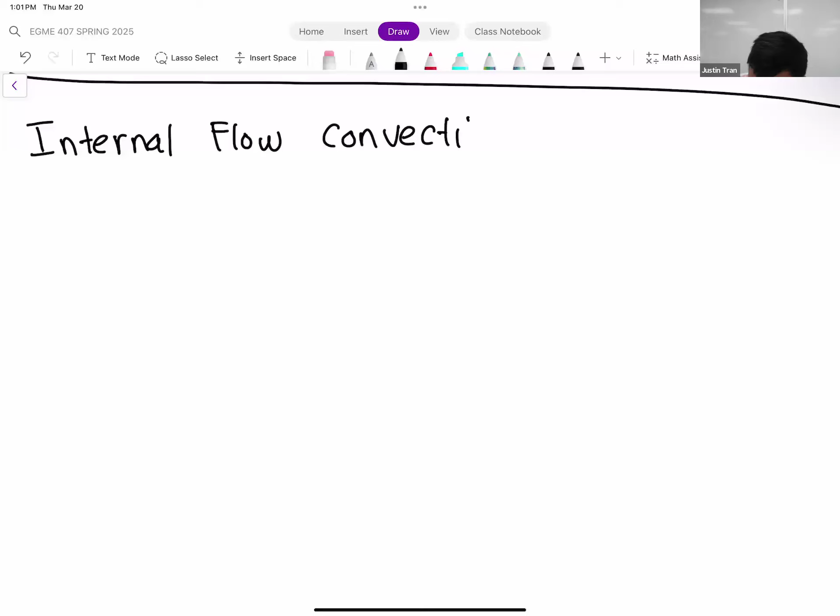So on Tuesday we started talking about internal flow convection. The theme of this entire unit is looking at convection in various different scenarios, because one thing we've been talking about for the past couple of weeks is that the flow conditions or the fluid mechanics of the situation play a big impact in terms of the heat transfer in these kinds of situations. So every time you have a different type of geometry, a different type of flow condition, that's going to necessitate a different discussion on the convection, okay?

In particular, in internal convection, we're looking at flow situations where the flow is bound on all sides by some kind of solid surface.

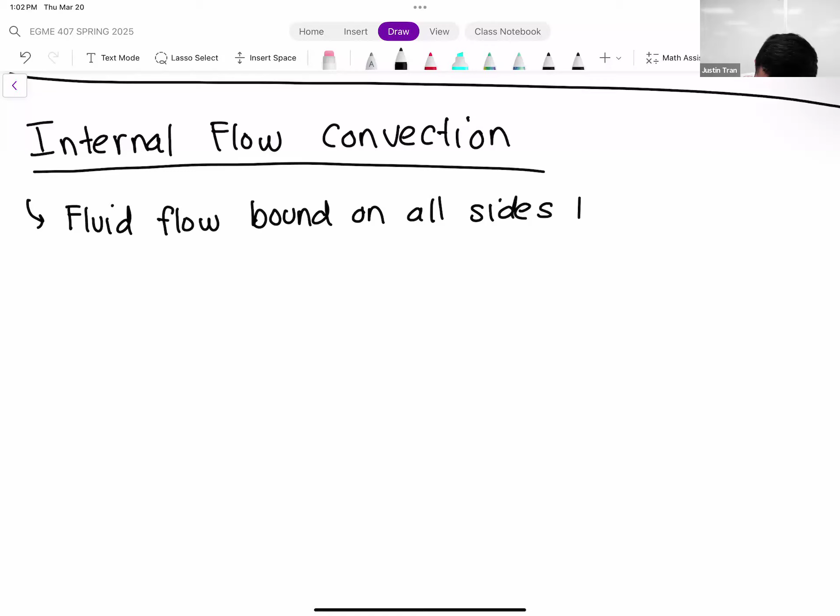Okay, so the very typical case of internal flow convection is flow in a pipe. So you have flow coming in here. The big thing with internal flow convection is that there's no notion of a free stream, because once the flow enters this internal system, the boundary layers from all of the lateral walls are eventually going to meet.

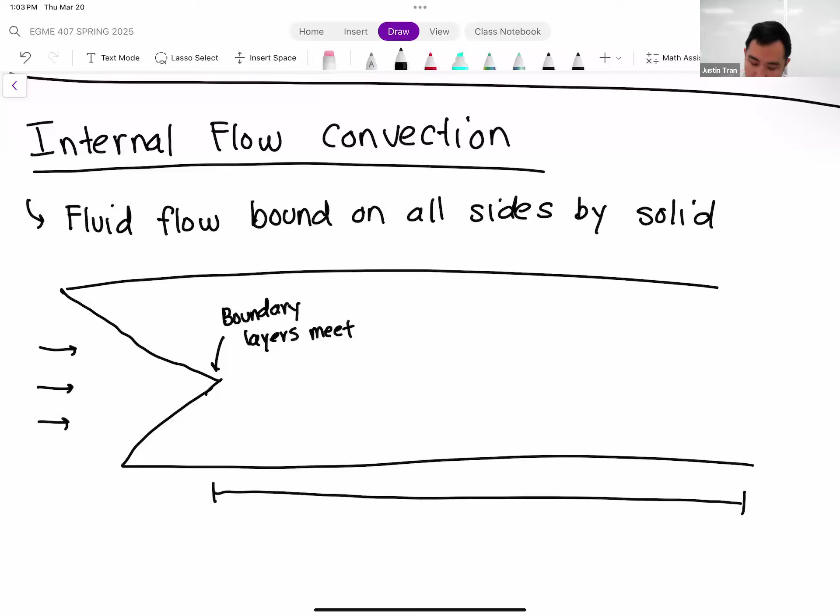Eventually, for pretty much every internal flow, unless your pipe is only a couple millimeters long, you're going to have a region which we call the fully developed region. The characteristics of the fluid flow and the heat transfer in this fully developed region have a very different character and behavior from what we discussed for the free stream, which is what we did last week.

One of the main differences is that because we have flow that's bounded on all sides, what we typically say is that inside this pipe we have a finite amount of fluid. Oftentimes you can compute a number for the volume of fluid inside a pipe — you just take the volume of the pipe itself.

That's significant because as we apply heating — let's say we're heating the fluid externally, or the fluid is losing heat, either case — because we have such a small amount of fluid inside this pipe, any kind of heating or cooling that we apply to the fluid is actually going to make a big impact. It's going to influence the temperature of the fluid itself.

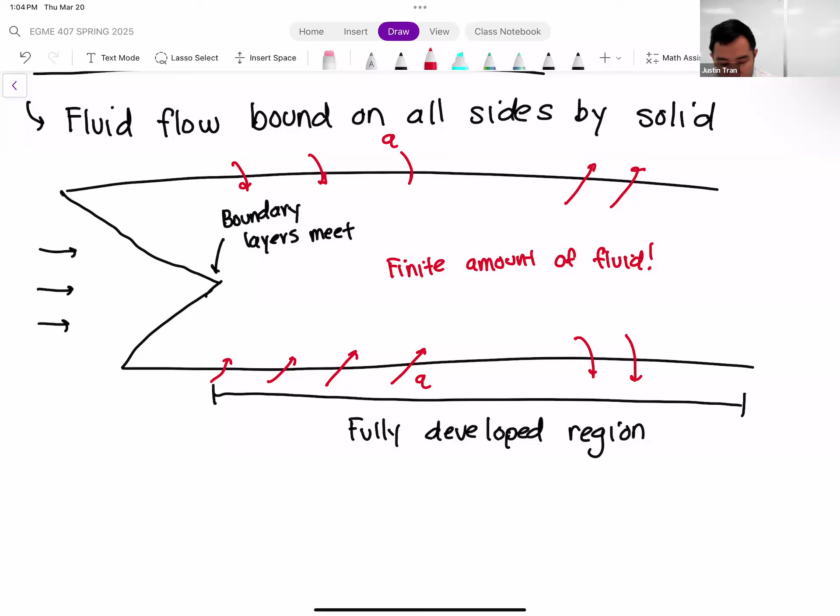So that's the biggest difference compared to pretty much everything we've heard so far: the temperature of the fluid inside the pipe is actually going to change along the length of the pipe. That's in stark contrast to external flow, where we assume our free stream temperature and free stream velocity are usually not really affected by the fluid, so we kept those constant. But in internal flow, instead of T infinity, we have Tm, the mean temperature, and we know the mean temperature is actually going to change.

So that's the first thing I want to start with today: what are some methods, or how do we actually solve for this mean temperature, and how does it typically change from one point to another along the pipe?

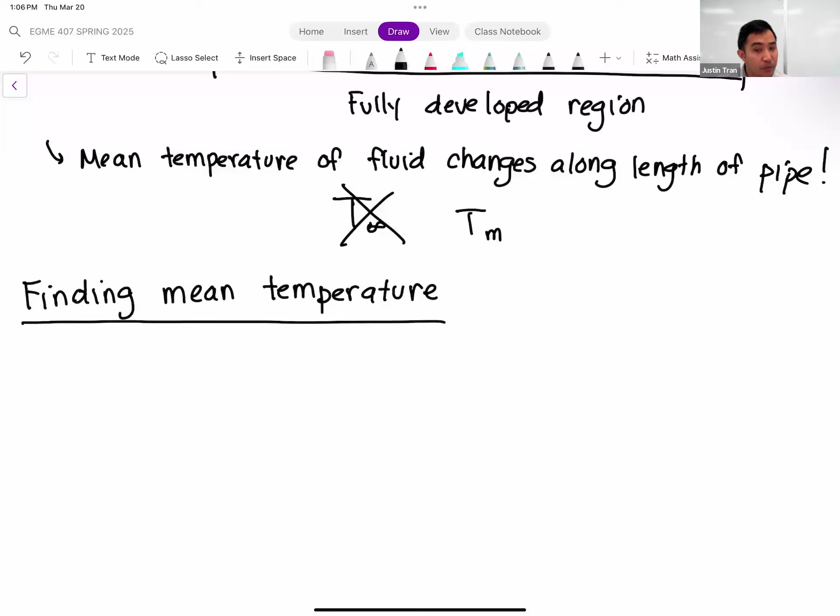Let's see if we can come up with an equation or formula, a way to compute this mean temperature at two different points in our fluid. Let me go ahead and draw our pipe here. We have flow coming in, and let's say that typically we describe the flow as a velocity, but since our velocity is also changing across the cross section, it's a little more convenient to talk about it in terms of its mass flow rate.

So I'm going to start to introduce m dot — the mass flow rate of fluid going through the pipe. Typical units for mass flow rate, which you've probably seen in other classes before, are mass per second. That tells you just how much mass of fluid is going through the pipe at any given second.

Okay, the next thing I'm going to draw here is an energy balance. Let's draw a very small control volume here. This little dotted box is our control volume, and on this control volume we're going to do an energy balance, which we'll use to come up with an expression for the mean temperature in the fluid itself.

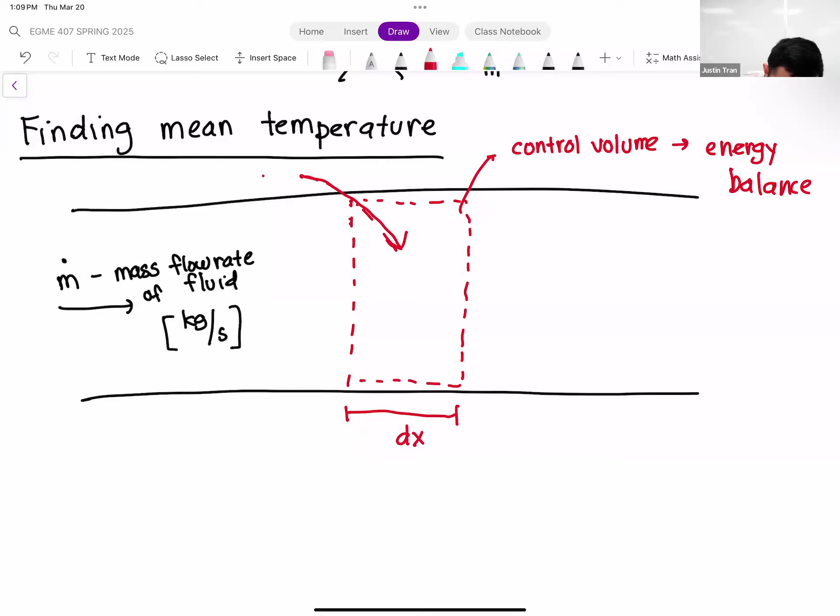To keep things simple, we're just going to assume one source of heating — some heating coming from the wall into this control volume. That's going to be Q convection, or more specifically dQ convection, just to indicate that it's on a small control volume. This is going to be the heating that occurs through the wall into our control volume.

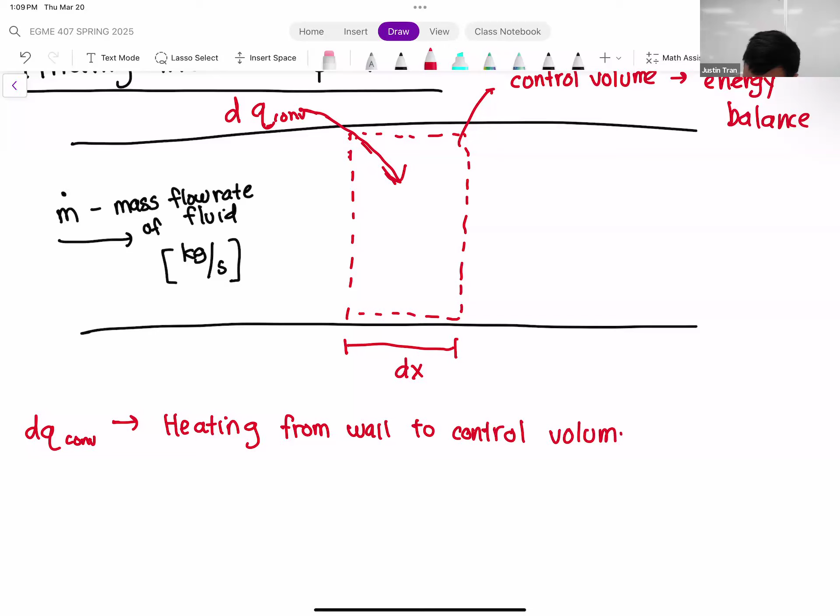Okay, so let's see if we can come up with an expression for dQ here, based on some things that we know. First thing we're going to set it equal to is dQ convection equal to our Newton's law of cooling.

Anytime we have convection heat transfer, we can always relate that to Newton's law of cooling. So we can say that dQ convection is equal to H, the convection coefficient, multiplied by the surface area of this segment here. I'll call that dA for now, the surface area of our control volume.

As part of Newton's law of cooling, we need to multiply this by a temperature difference. In this case, the difference between the surface temperature of the pipe and the mean temperature of the fluid, so this is Ts minus Tm. Ts is the surface temperature at the wall, and Tm is the mean temperature within that control volume.

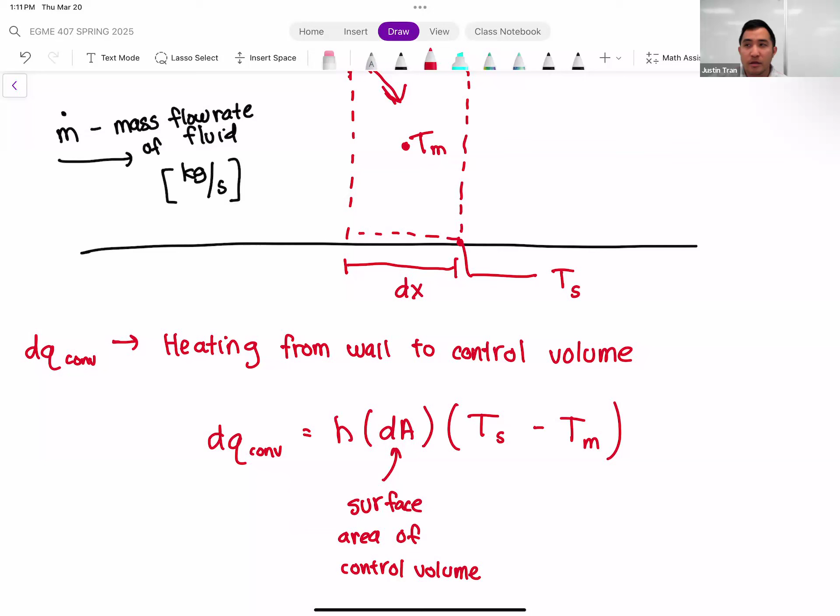In a generic case, both the surface temperature and the mean temperature of the fluid are going to evolve from one point to the next. If we look at another control volume, the surface temperature and the mean temperature are going to be different at that location, but we're just focusing on this small one, right in the middle there.

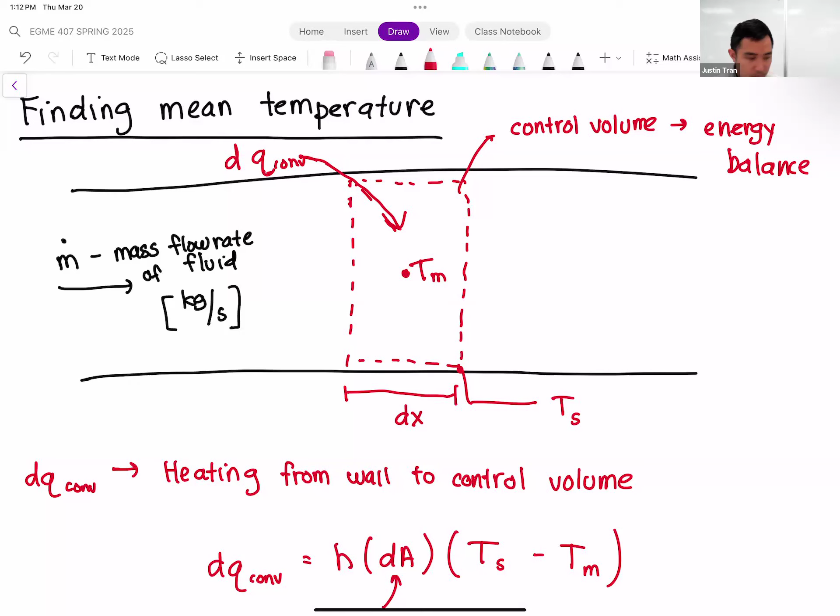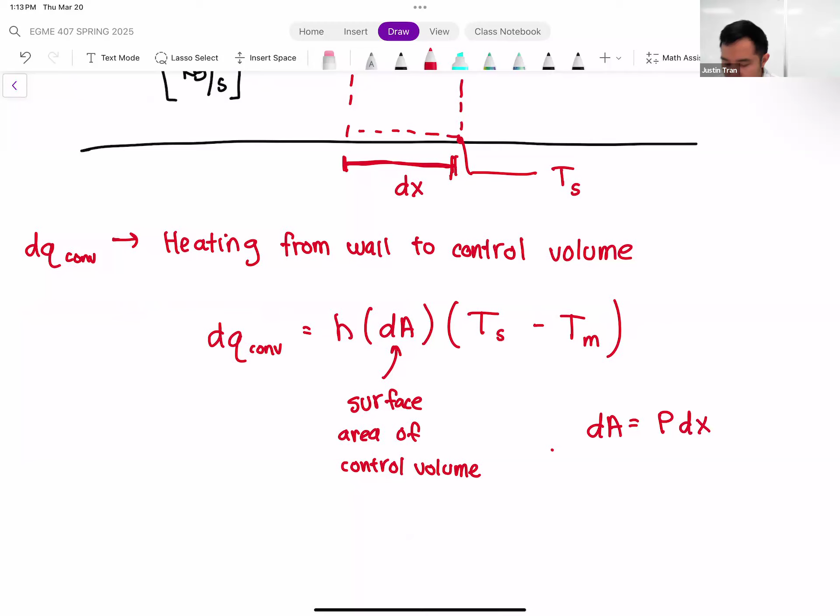One other thing I'm going to do to simplify this, we can come up with an expression for the surface area, or plug in for that a bit, because we know the width of this control volume is dx. To compute the surface area of this section, we leverage the fact that this is a cylindrical geometry, so the surface area equals the perimeter of the pipe around that cross section, multiplied by the width of our section, so it's P dx.

I should probably stop using red. So if we plug that in, we get dQ convection is equal to HP dx times Ts minus T infinity. This right here is simply an expression of Newton's law of cooling on this small control volume.

Any questions on this so far? All right, so let's see if we can come up with another expression for dQ convection, because I did say that we are going to do an energy balance on this control volume.

So let's do our energy balance now. Oh, thank you, I messed that up. So it shouldn't be T infinity, it should be Tm. Thank you.

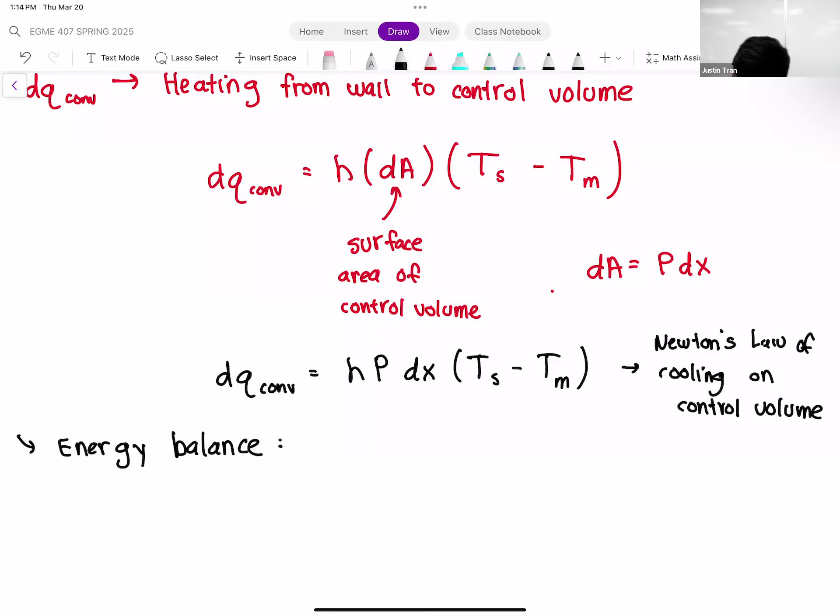For our energy balance here, we're basically going to say that the heating we're applying to this control volume is going to result in a change in temperature. Because of conservation of energy, energy can't be created or destroyed, and if we are inserting energy into our fluid, that has to have some effect we can observe. The first thing we can observe when you add thermal energy is a change in temperature.

So what we can say is that dQ convection is equal to a change in temperature, so this is equal to dTm, where dTm represents a change in temperature in the fluid.

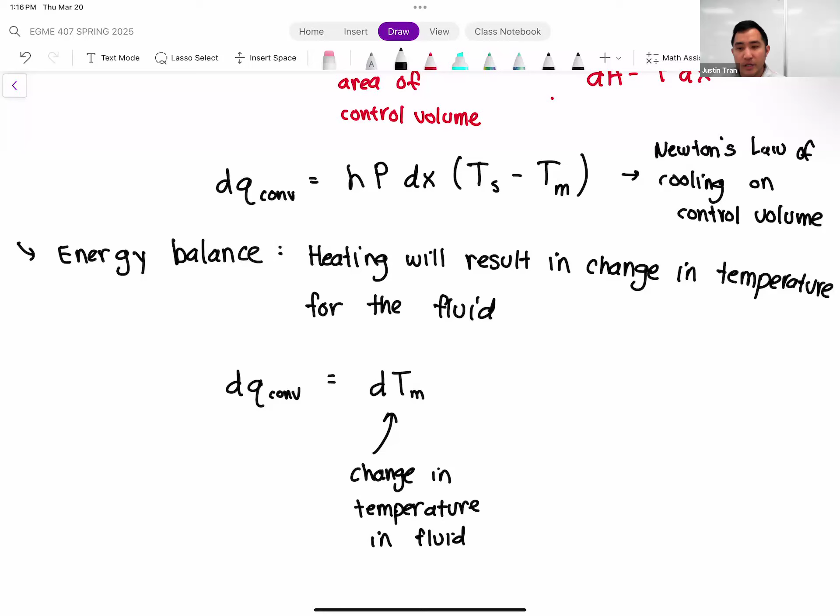We need to multiply by some other factors here, mostly to make the units work out, but also to account for the fact that different fluids have different changes in temperature, because different materials or fluids have different heat capacities. That should be reflected in this equation too, so the two things we need to multiply by, the first of which, is CP, the thermal capacity of the fluid. Remember, we saw this quantity back when we did lumped capacitance.

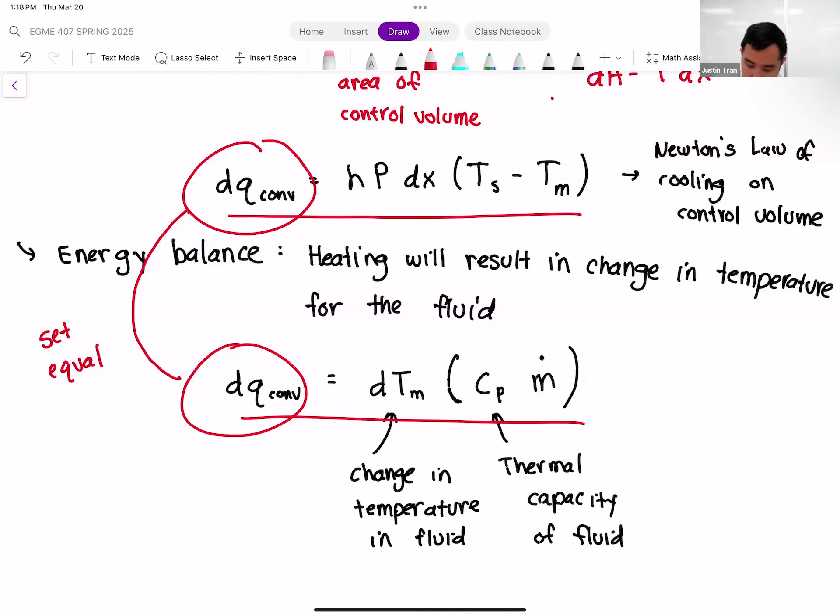So when we do that, let's do the Newton's law of cooling side first. We have H P dx multiplied by TS minus TM, and this is equal to the conservation of energy side, which says dTm multiplied by CP m dot.

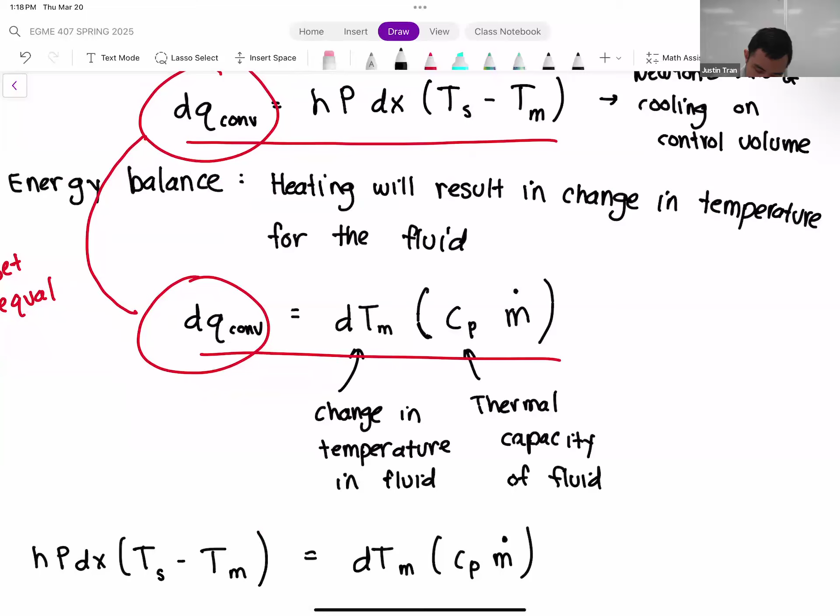Let's rearrange the terms a little bit here, just so that we can obtain a differential equation for this. So I'm going to take dx and divide both sides by dx, so that's going to come over here. I'm going to take this CP times m dot and divide both sides by that, and that's going to end up on that side. So if we do that, we get P times H divided by m dot CP times the temperature difference TS minus TM is equal to dTm dx.

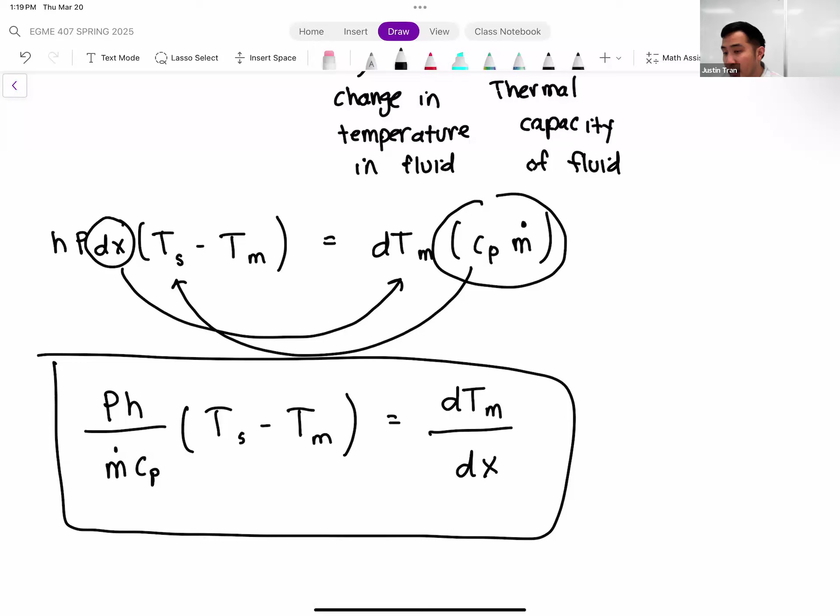And so what we have here is an equation that we can use that describes the evolution of the mean temperature in an internal convection situation. Any questions on how we got this equation?

So it looks like a fairly straightforward equation, a differential equation. We do have a first order derivative, but we've definitely seen scarier things in this class. But it turns out this equation is actually very difficult to solve, because you can't really just straight up integrate it. First of all, you have Tm on this side, which is what we're solving for, and we have Tm on this side as well. So just by the existence of these two things on both sides, this tells us that Tm changes along the length of the pipe, or in other words, it changes in the x direction. And that's the first thing that complicates this, so it's not just going to be a straight up integral on both sides.

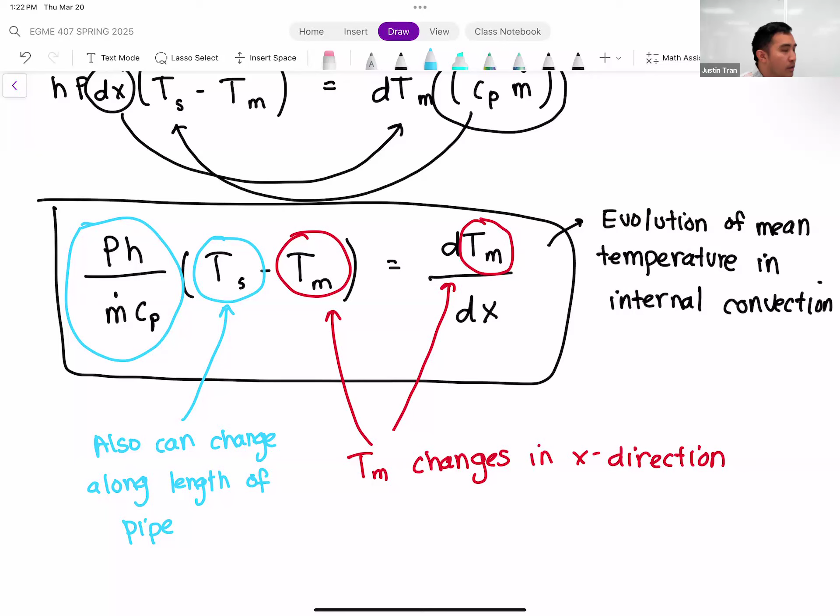But another thing that we haven't really talked about is that another thing that can change along the length of the pipe is the surface temperature. And we don't really have an equation that will tell us how TS will evolve. So this equation, even though it looks quite simple, and even though everything out here, the P H, m dot Cp, are typically constants, the fact that we essentially have two unknowns in this equation, both Tm and Ts, means that we cannot really solve this equation without applying some assumptions.

So we can really only solve this equation under some very specific circumstances, very specific assumptions, which in reality, it's very hard to find one case or the other. We'll talk about some cases where these assumptions are valid, but most practical situations are never going to be one or the other — they're going to be more in between. So part of the challenge of doing these problems is making the judgment call, making your own judgment in terms of which of these situations it's going to be closer to.

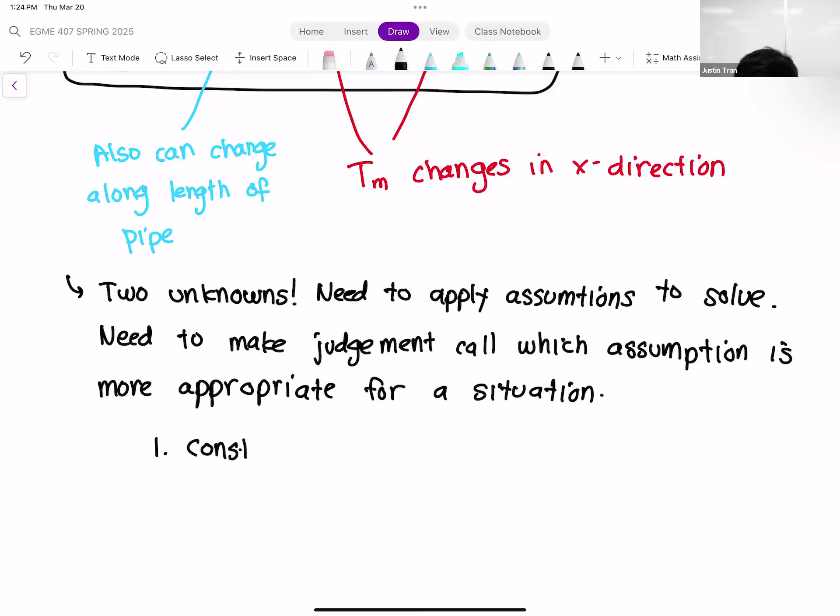So the first situation, which is a little bit simpler, is if we assume that we have constant heat flux from the wall. That's the first example we'll do, and you'll see what the solution looks like in that case.

And the second condition, which is more appropriate in other situations, is if we assume that our surface temperature, so the temperature at the surface of the pipe, is going to be constant.

So you're never going to have both of these, you're going to have just one or the other. I want to emphasize that. For this situation, you're going to choose one of these assumptions, and which one you choose is going to be more appropriate in some situations than others. Any questions on this so far?

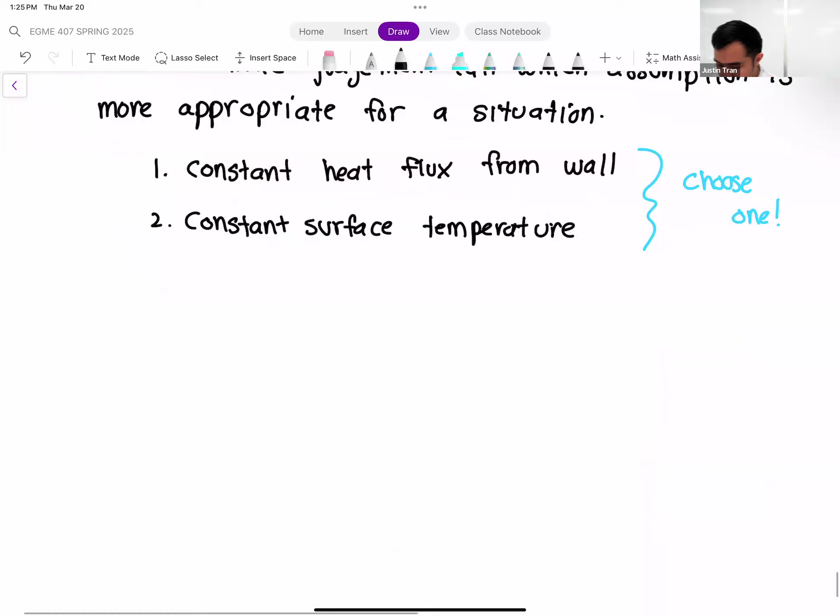All right, so let's look at the case for constant heat flux from the wall. So what this is basically saying is that as we go along the pipe, the heat flux that's coming in, which we're going to call QS double prime...

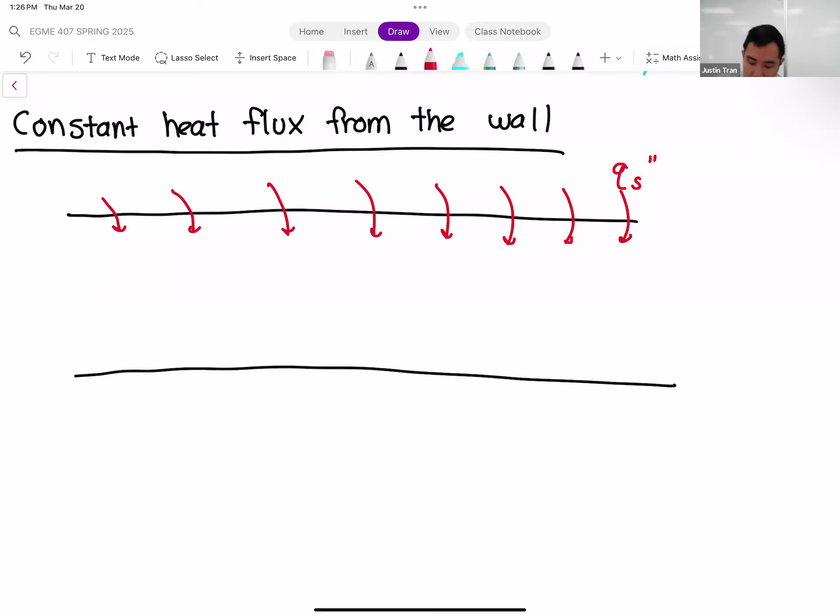So the heat flux in the pipe is going to be the same from one location to the next, and so we have a constant QS double prime. It's going to be the same at the end of the pipe, the same at the middle of the pipe, the same at the beginning of the pipe. So all throughout the pipe, you have a constant influx of heat, and that value is consistent along the entire length of the pipe.

A common situation where this would occur is that maybe you have some kind of consistent heating applied by an electric heater. It's common nowadays to have an electric heater wrapped around the pipe, supplying a constant heat flux throughout the entire length. Another case, actually, just thinking about it...

If you look at the design of newer houses nowadays, it's very popular to have something called a tankless water heater. The way it works is that it runs the water main pipe through this tankless water heater, a section of pipe that goes through it like this. And on this pipe, if you talk to a plumber, they'll say you basically have like a jet engine inside your water heater, just a ton of flames.

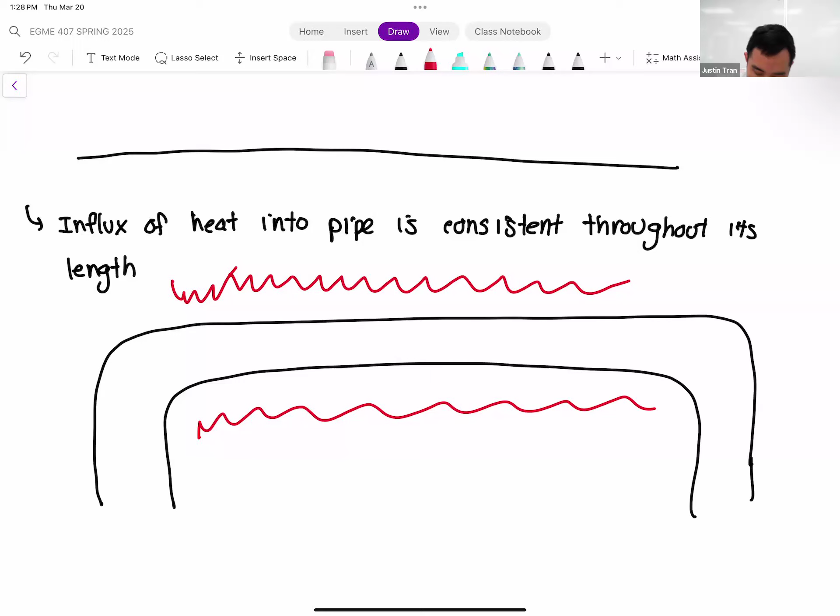You have basically a broiler heating your pipe through this section. The idea is that without a water tank or heat tank, this device is able to provide enough heat through the pipe to supply enough hot water for your entire house. So this would be another example of constant heat flux through the pipe, because this flame is consistent throughout the length of that pipe.

It's really cool. I was able to take a look at mine about a year ago when it broke, and I was bugging the plumber to let me see. But yeah, it is kind of a cool thing.

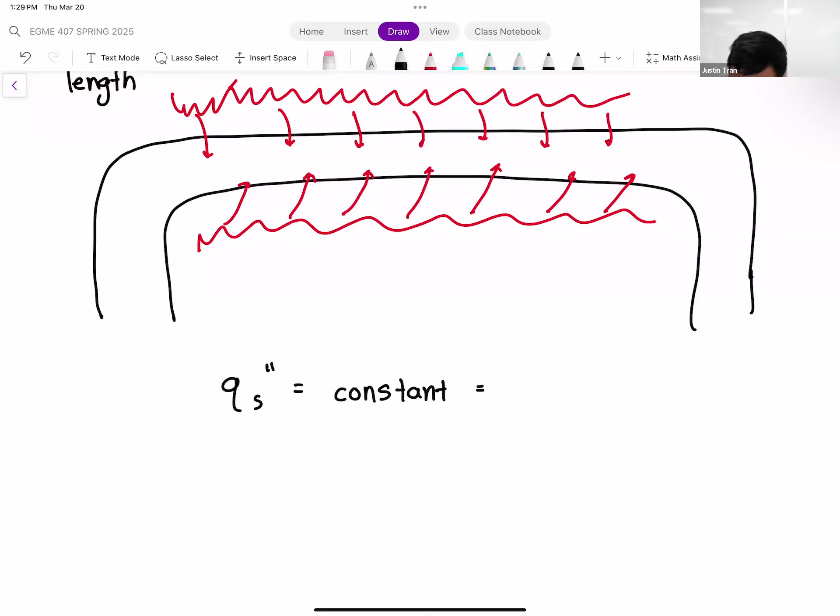So in this situation with a constant heat flux, this actually simplifies our calculations quite a bit, because if QS double prime is constant, what's another expression for QS double prime? We can put this in terms of Newton's law of cooling, so we can say this is equal to H times TS minus TM. That's just the definition of heat flux in internal convection, the convection coefficient multiplied by the difference in temperature.

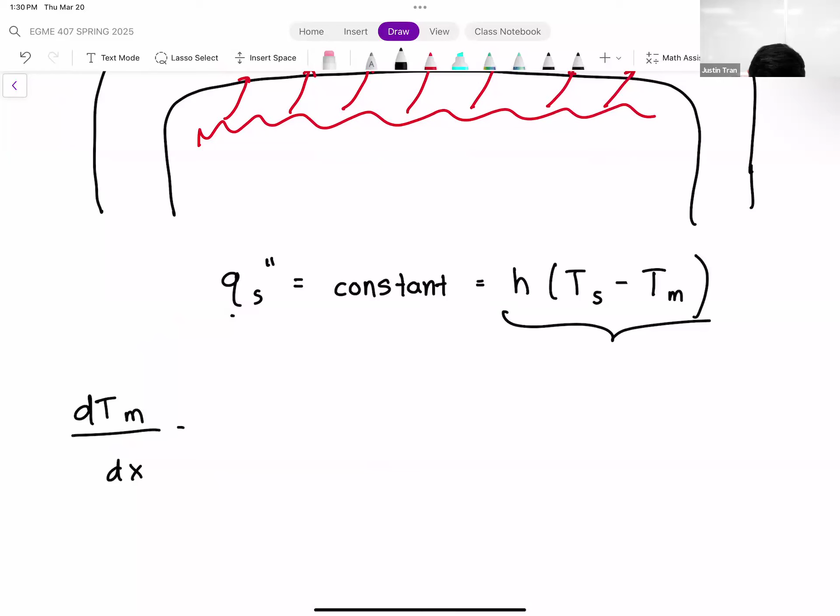But if these two are constant, if we make this jump in logic that QS double prime is constant, that means this quantity H times TS minus TM is also going to be constant. Now TS and TM individually might be changing, but their difference is always going to be constant in this case, so we can make that substitution. If we come back to our differential equation, let me write it down again: dTm/dx is equal to pH over m dot Cp times Ts minus Tm.

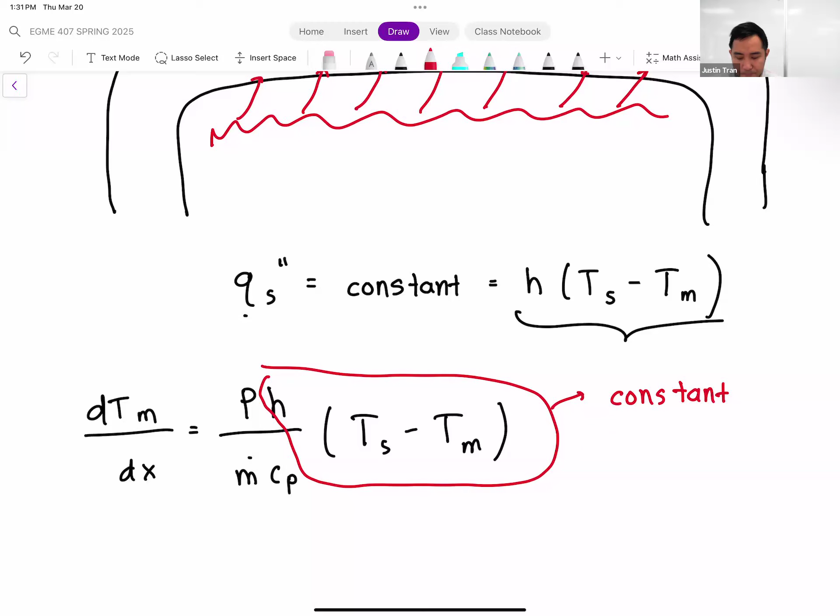Okay, so this right here is our generic formula for the evolution of mean temperature in internal flow. We haven't made any assumptions yet, but if we make the assumption that this quantity here, H times Ts minus Tm, is constant...

So if we assume that it's constant and plug in Qs double prime for that, we have dTm/dx is equal to P over m dot Cp times Qs double prime.

Suddenly we have a very easy differential equation to solve, because everything on the right-hand side, the perimeter of the pipe—assuming constant cross-sectional area, which most pipes are unless you're designing a literal jet engine—the mass flow rate, the heat capacity of the fluid, and Qs double prime, the heat flux, are all constant. So everything on this side of the equation is constant.

That's fantastic, because then we can integrate this with respect to x. What we get is Tm of x is equal to the integral of P times Qs double prime divided by m dot Cp, all of which is constant, so we end up with P Qs double prime divided by m dot Cp times x.

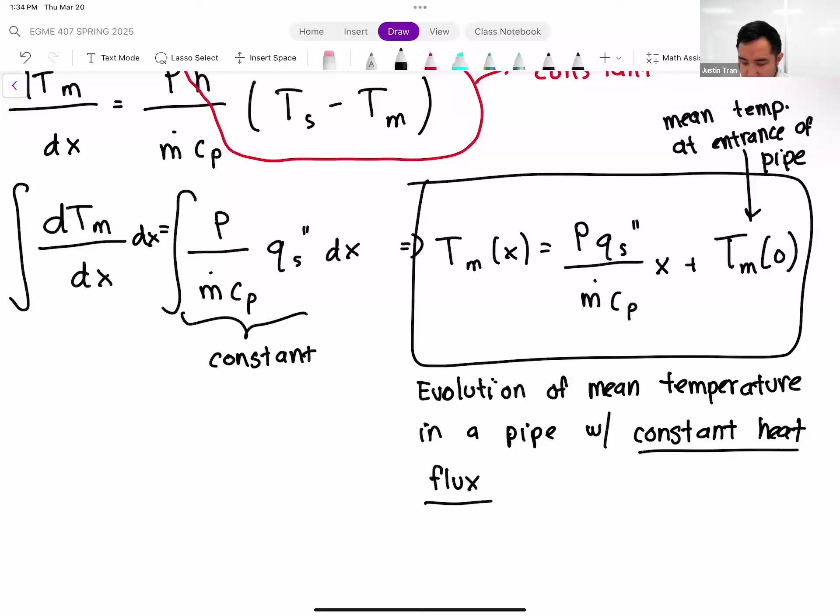Okay, so let's do a quick example of this, just so you can see how all of this works together. Let's look at a tankless water heater.

Let's say a tankless water heater is responsible for heating the water that goes through it from 20 degrees C to 60 degrees C.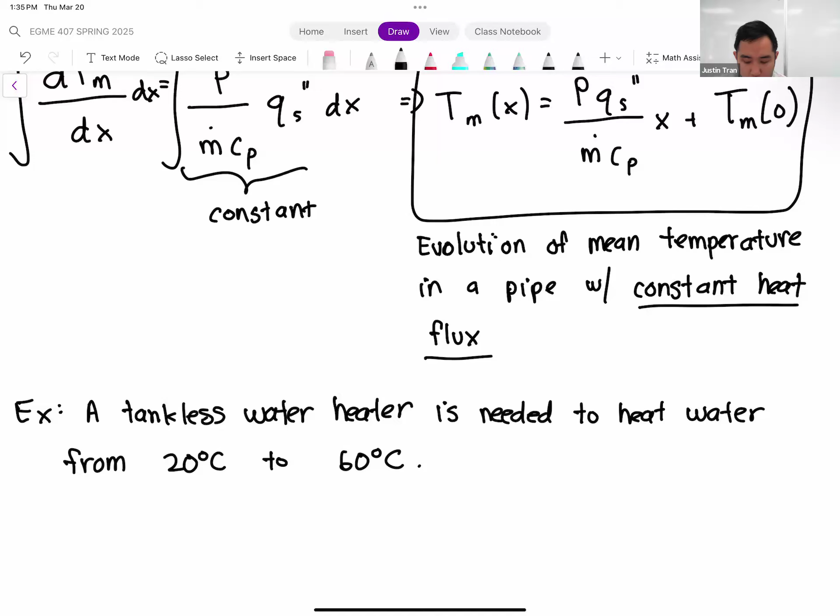And the way it's going to achieve this is by inputting a constant heat flux through the wall. Actually, we do know that number—let's say our heat flux, Qs double prime, is equal to 1.5 times 10 to the fourth watts per meter squared.

Okay, so our figure for this is going to look like the following. We have our pipe, and we know the pipe is going to have a constant heat flux through the wall.

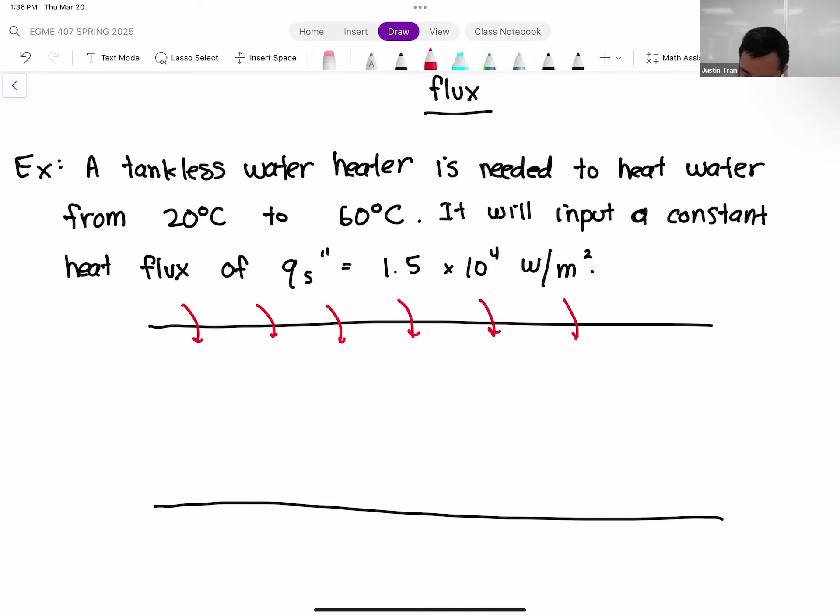So coming through the wall here, we have Qs double prime—that's going to be heating it. We actually know the value of Qs double prime in this case.

Other information that we know is the mean temperature at the inlet. So we can say that Tm at the inlet of the pipe—when the water comes in, it's going to start at 20 degrees Celsius. And by the time it reaches the end, if we mark out Tm at the outlet, or TmO, this is going to be 60 degrees Celsius. So the water is going to heat up from 20 degrees to 60 degrees.

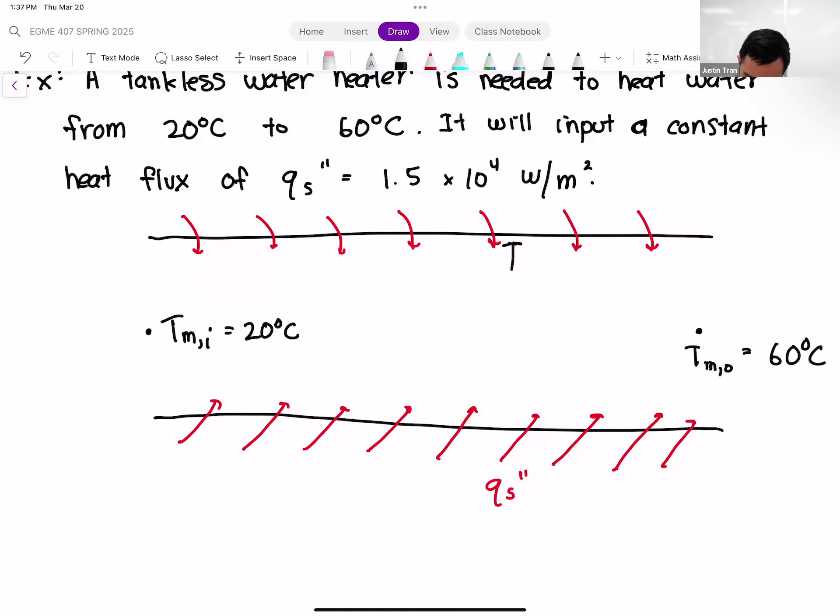Other information that we know is the diameter of the pipe. So the diameter of the pipe—and we've already assumed that the pipe is cylindrical—the diameter of the pipe is going to be 20 millimeters.

Let's see, what else do we know? We know the mass flow rate. We need to know that. The water is going through the pipe at a mass flow rate of 0.1 kilograms per second.

And we also know the surface temperature of the pipe as well. So the temperature of the pipe, at least at the outlet, I should specify that. So the temperature of the surface at the outlet, this is equal to 70 degrees Celsius.

So with all this information here, let's compute two things. The first thing we're going to compute is we need to compute the length of pipe that's needed to achieve these conditions.

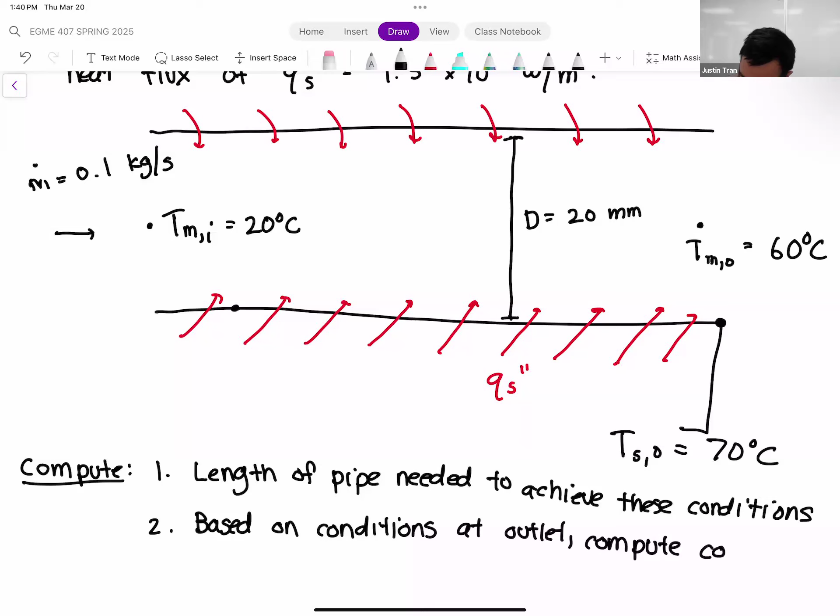Number two, based on the conditions at the outlet, we actually know the surface temperature and the mean temperature. Let's use that information to compute the convection coefficient of this flow. We don't really need the convection coefficient, so we're going to do most of the analysis without it, but it's at least convenient to know, kind of nice to know what it is for this case.

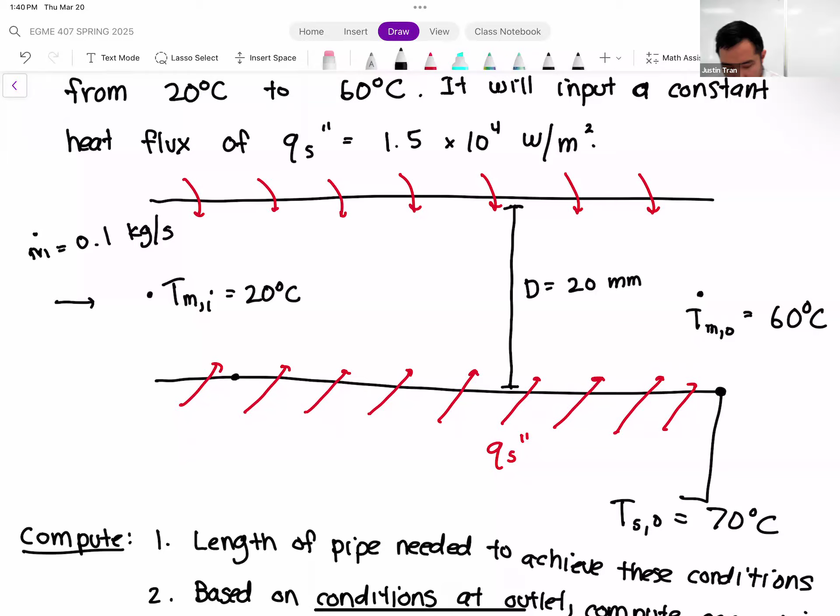So this problem here is mostly about our mean temperature formula, and we're going to use that first to compute the length of the pipe. Any questions on the setup for the problem, any of the parameters we have here? Okay, let's get to solving it. So let's compute the length of pipe needed. To compute the length of pipe that's needed, we are going to need to use our mean temperature equation.

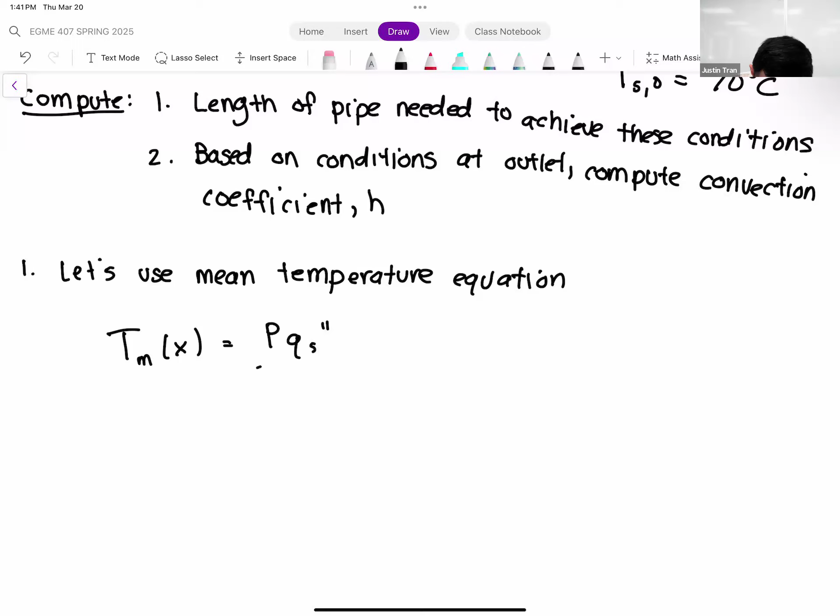So our mean temperature equation Tm of x is equal to, and we're going to use the version of this equation that's for constant heat flux, right? That's the one we developed right before we started this example. So it's going to be P times Qs double prime divided by m dot Cp, times x, plus Tm of 0.

So we can plug everything into this equation here, and eventually what we're going to solve for is x. Because Tm of 0 right here, this is essentially our mean temperature at the inlet, which we know in this problem is 20 degrees C.

We want to find out how long it's going to take in order to heat up the fluid from 20 degrees to 60 degrees. And so this Tm of x, we're going to set this equal to Tm at the outlet, which is 60 degrees C.

So besides that, we know Qs double prime. This was given to us in the problem, and this is 1.5 times 10 to the 4th watts per meter square. We know m dot, which was also given to us, the mass flow rate. This is 0.1 kilograms per second.

The perimeter wasn't directly given to us, but we were given the diameter. So the perimeter is just going to be pi times the diameter. Make sure to convert that diameter to meters.

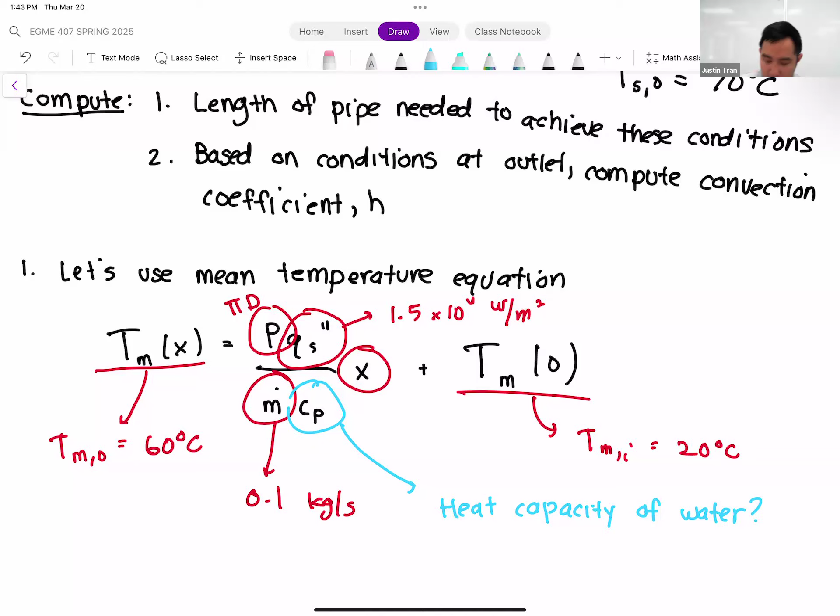You can use one of the tables in the textbook, or you can use the online fluid calculator that I sent out end of last week.

Then of course the question is, what temperature do you use? Because you need to specify a temperature when applying these properties. We know our fluid here is going to transition from 20 degrees Celsius to 60 degrees, and right in the middle is about 40 degrees Celsius. It's not going to be perfect because the heat capacity is actually going to change as the fluid transitions from 20 to 60 degrees Celsius, but it's a good average point.

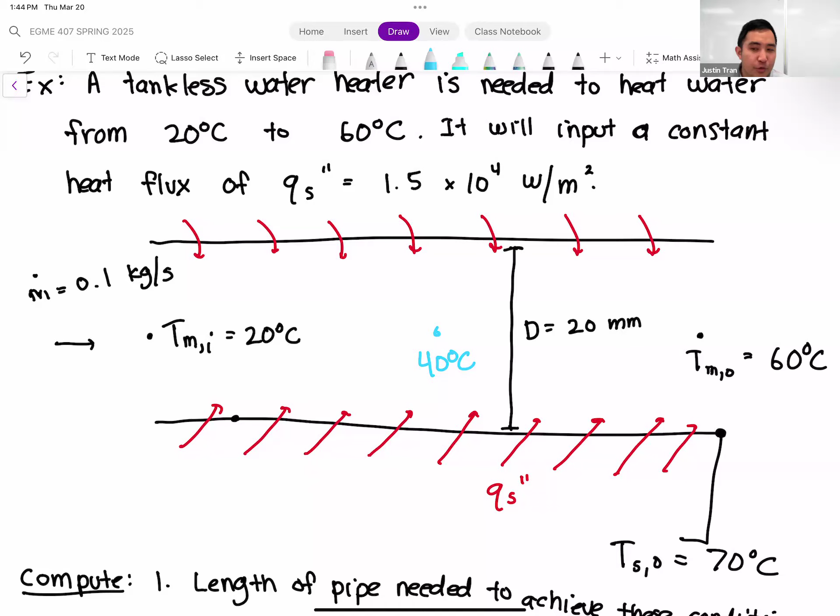So at 40 degrees Celsius, what we have is Cp is equal to 4,179 joules per kilogram Kelvin. All right, so if we plug all those numbers in, then what we get is 60 is equal to 2.255 times x plus 20.

So that 40 degrees Celsius, is that related to the film temperature at all? It is - it plays the same role as the film temperature because you need a temperature to evaluate these properties at, just with a slightly different definition. We're computing the mean, or average, of the mean temperatures - the average between the inlet and outlet temperature. Film temperature is the temperature within the boundary layer, but in internal flow we don't really have a boundary layer, so that applies more to external flow. But it plays the exact same role - it's the temperature you evaluate the properties at, just with a slightly different definition here.

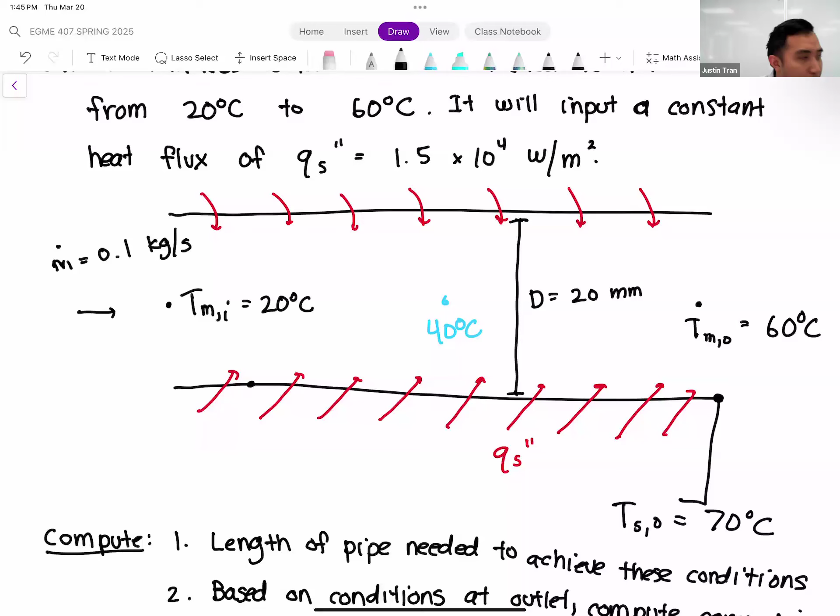Okay, so this is our equation here. The last thing we need to solve for is x, which is going to be the length of the pipe. So if we solve for x, what we get is x is equal to 17.74 meters.

So that's a pretty long pipe, but heating water from 20 degrees Celsius to 60 degrees is also a lot of heating, so it makes sense that the length of the pipe is quite long. Okay, so that's part one of the problem.

Part two is to compute the convection coefficient, which again we didn't really need here - we already found our design variable, the length of the pipe, without it. But it's good trivia, right? So at the outlet, what you're going to see is that we actually have all the information we need. We actually don't need to use the Nusselt number here at all.

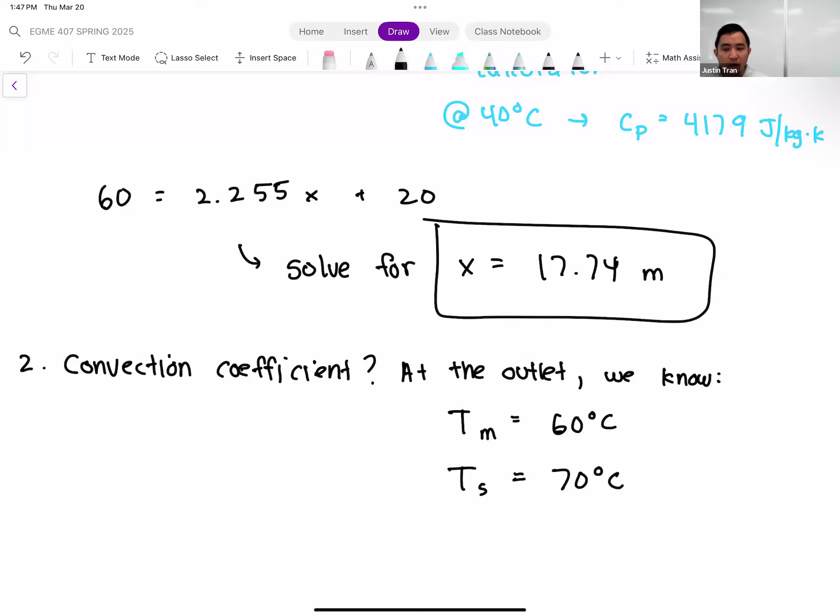At the outlet, we know the mean temperature is 60 degrees Celsius, and we know the surface temperature is 70 degrees Celsius - both given in the problem. So we know the difference between the surface temperature and the mean temperature. We also know the heat flux, since it's consistent throughout the entire pipe - here it's 1.5 times 10 to the fourth watts per meter squared.

So based on all this information, we can compute H straight up from this situation, because if we apply Newton's law of cooling, our favorite formula: Q double prime S is equal to H times Ts minus Tm. We know every quantity here, so we can just compute H as simply equal to Q double prime S divided by Ts minus Tm. Doing that simple division, we get 1,500 watts per meter squared Kelvin.

This highlights an important point I want to make: sometimes you don't need to go through the entire song and dance of computing the Nusselt number to get the convection coefficient. Sometimes you can extract that information for internal flow straight off the properties or numbers given in the problem.

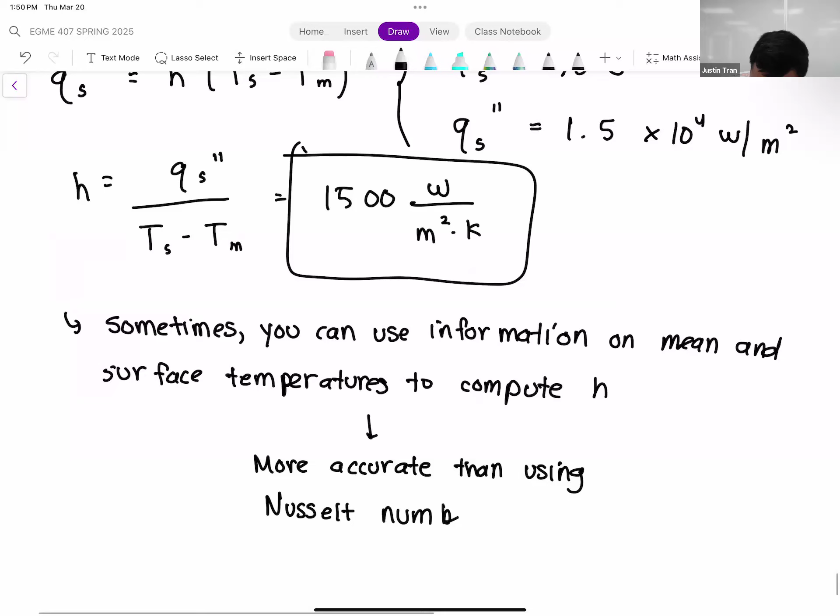So you have to be careful of these situations - we're actually going to revisit this later. We're not done with the Nusselt numbers, we are going to bring them back. When you have a choice to compute the convection coefficient either using a Nusselt correlation or using information from the problem, this method is going to be more accurate. So the Nusselt numbers should only be used as kind of a last ditch effort, and you'll see why very soon, probably at the end of class.

Alright, any questions on this so far? Okay, let's look at the other case. So this was the first assumption we can make - the assumption of constant heat flux through the wall. Let's look at a case where we have constant surface temperature instead.

Let's start by writing out our mean temperature evolution equation: dTm/dx is equal to H times P divided by m dot Cp, times Ts minus Tm. That's our generic evolution equation, and in this case we're going to assume that Ts is constant.

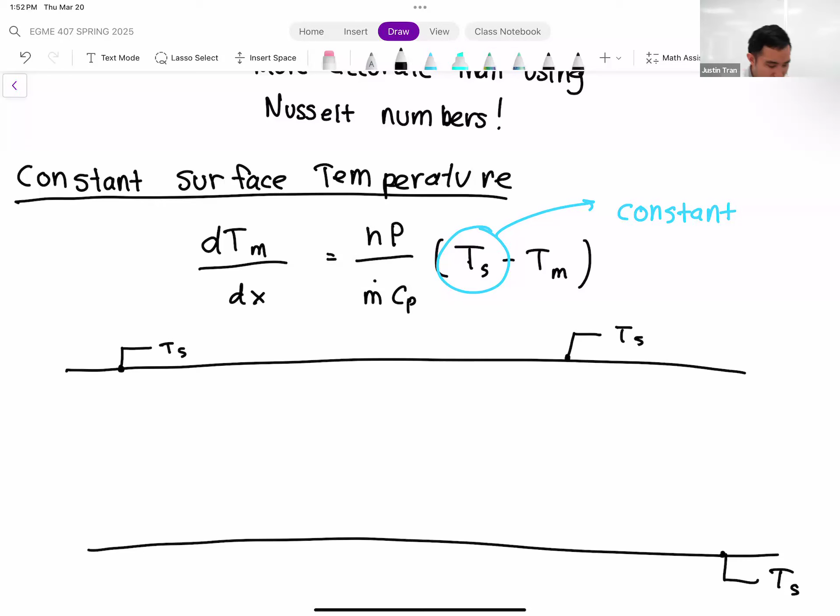This illustrates a situation where if you have a pipe that looks like this - if we measure the surface temperature here, and here, and here - what it means to have a constant surface temperature is that the solid part, or surface temperature of the pipe, is constant throughout the entire pipe. We'll do an example to show you what that looks like in a bit.

So this simplifies our equation, because now that we know Ts is constant - I drew two arrows saying the same thing, it's super constant now - we only have one more unknown in this equation, and that unknown is Tm. So let's refactor this equation to solve for it. To make things easier to solve, I'm going to bring back an old friend - let's bring back our excess temperature.

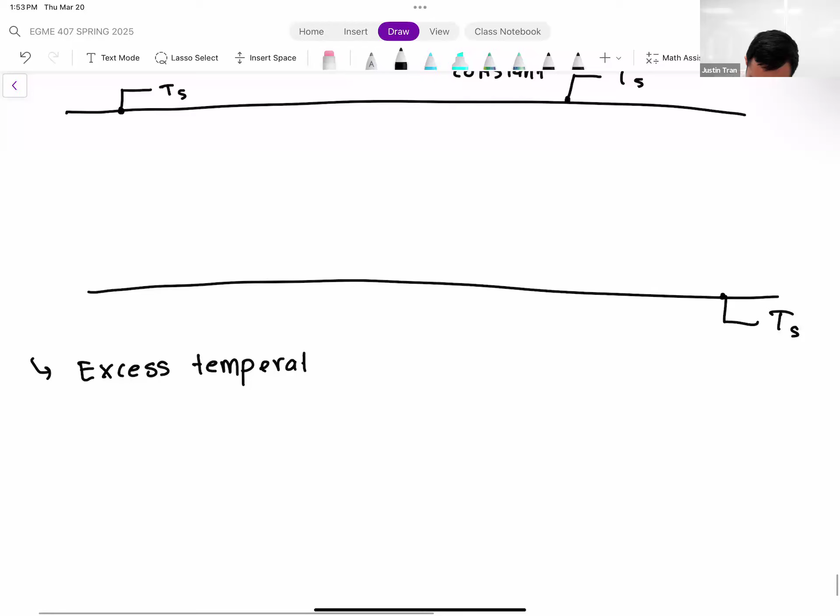So remember, excess temperature is the difference in temperature between two things. And so in this case, we're going to take the difference of Tm minus Ts.

Since we know that Ts is constant, that means if we take the derivative of the excess temperature, d theta dx, since Ts is constant, this is just equal to dTm dx.

So if we plug that back into our evolution equation up here, we get d theta dx is equal to minus hp divided by m dot cp multiplied by theta.

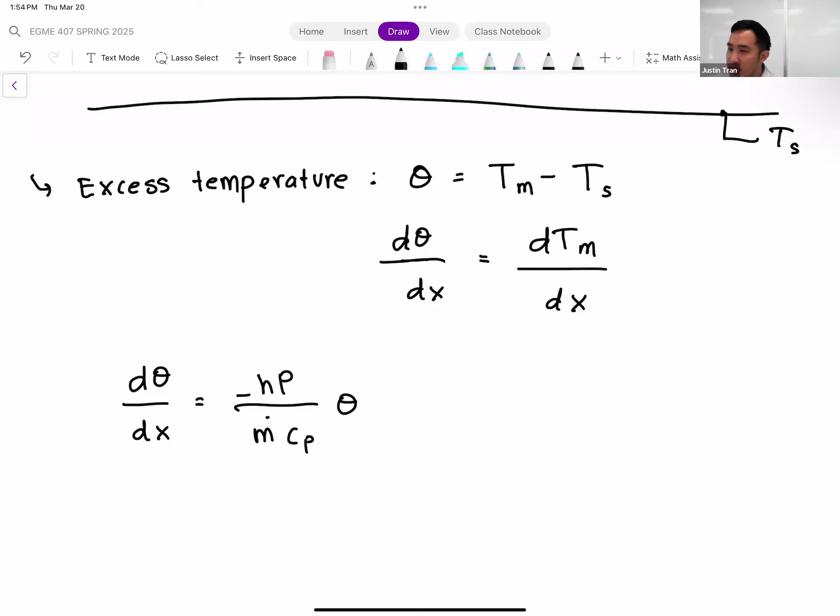We have that minus sign out in front on the right-hand side because of how theta is defined here. Theta is Tm minus Ts. If we look back at our equation here, we have Ts minus Tm. So we need a minus sign to make everything work out.

So here we have a first order equation, but it is one that we can solve pretty easily using separation of variables.

So let's go ahead and do that. Let's take theta and put it in the denominator on the other side. You have d theta over theta is equal to minus hp over m dot cp dx.

Let's go ahead and integrate both sides. And so if we integrate both sides, we get the natural logarithm of theta is equal to minus hp divided by m dot cp times x plus c.

And so if we want to simplify this and solve for theta, we're going to raise both sides to the e. So on the left-hand side, that's going to give us theta of x is equal to e raised to the minus hp over m dot cp times x.

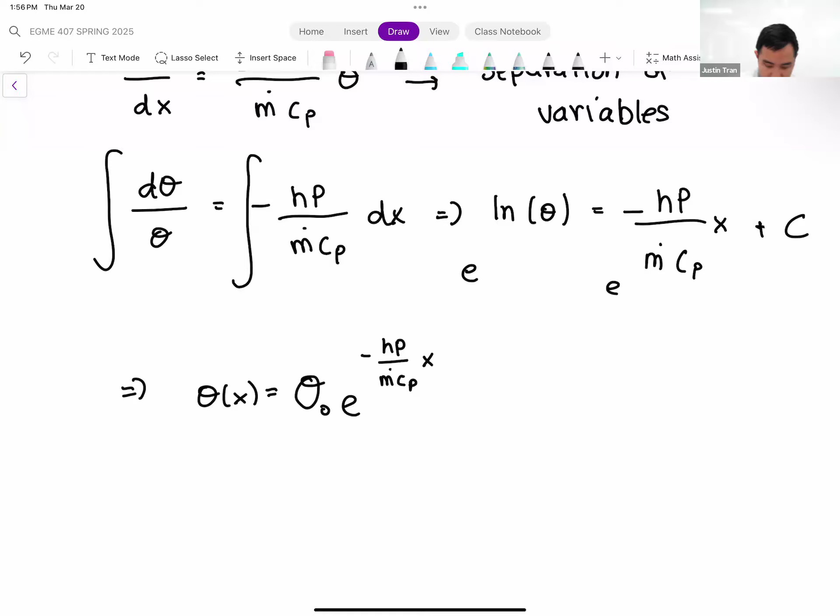And unlike previously, unlike back when we did our lumped capacitance, I'm actually going to plug back in Tm. So let's plug back into our excess temperature.

So our excess temperature is Tm of x minus Ts. That theta naught there is a constant that defines the excess temperature at the inlet. So theta naught is Tm of 0 minus Ts, multiplied by e to the minus hp over m dot cp times x.

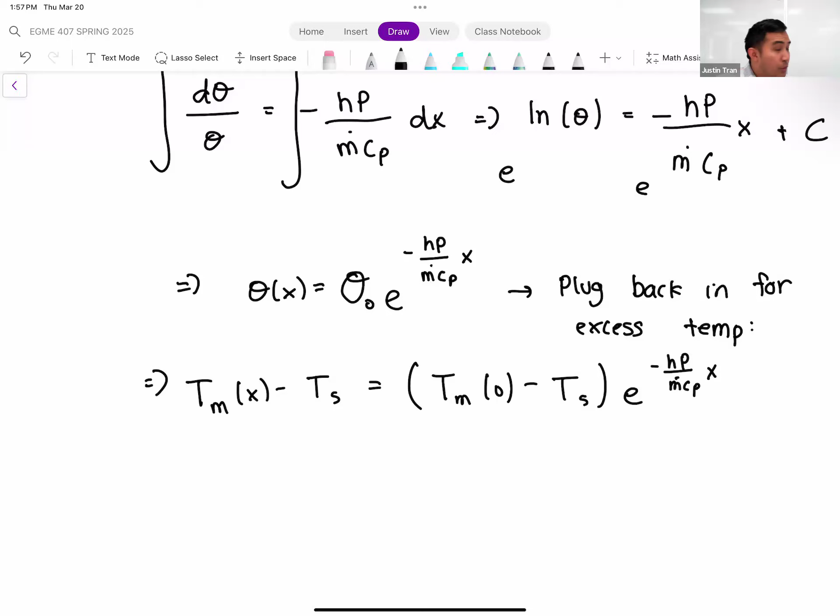All right, and then the last thing I'm going to do, just to simplify this whole thing, I'm going to move the surface temperature over to the right-hand side, so we get just one clean expression for Tm. So we get Tm of x is equal to the quantity Tm of 0 minus Ts, multiplied by e to the minus hp over m dot cp times x, plus Ts.

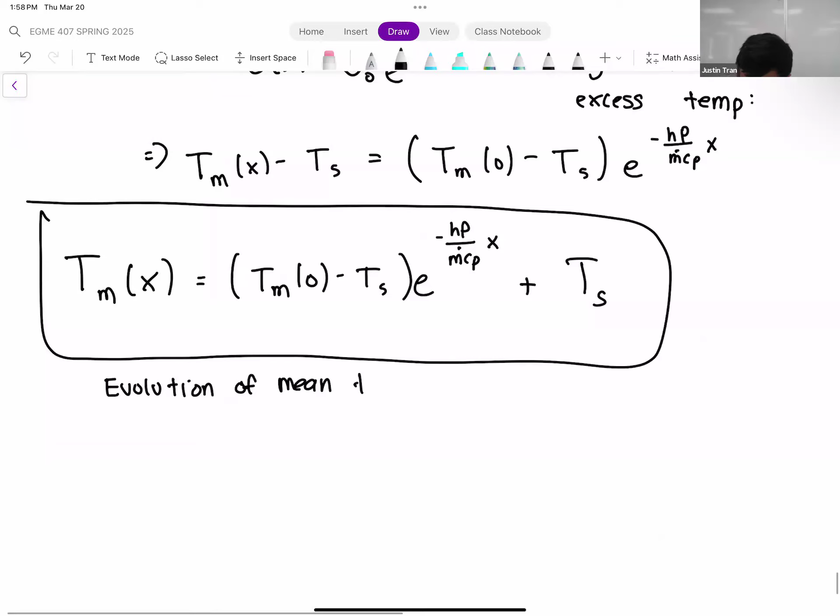So this is our evolution of mean temperature when the surface temperature is constant.

Any questions on how we got this expression here?

So we have two solutions basically: one solution for Tm when the wall flux is constant, and another solution for Tm when the surface temperature is constant. When you're doing these internal convection problems, that's one thing you have to determine: is it more likely that our surface temperature is constant, or is it more likely that our wall flux is constant?

So for each problem...

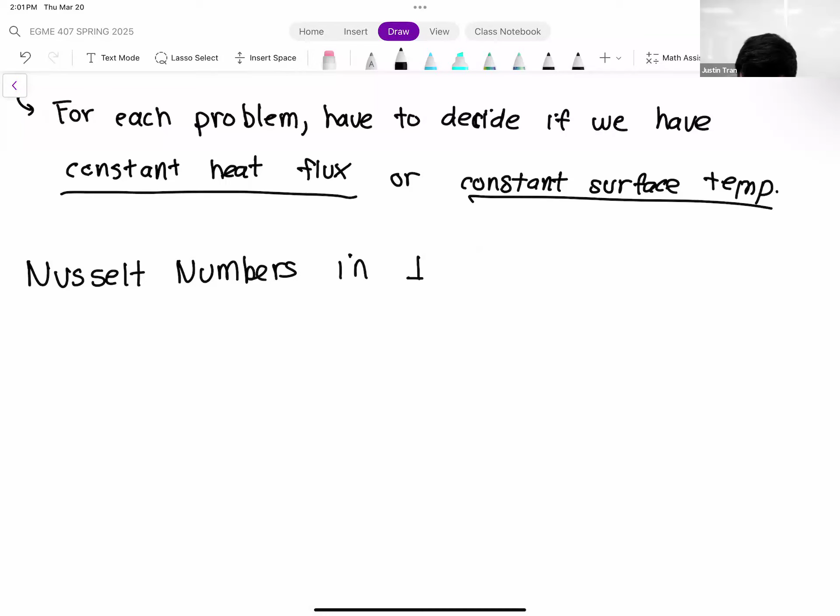The reason I'm taking a break here to talk about Nusselt numbers is that if you look at our solution for the mean temperature in the case of constant surface temperature, you can see that we have H in this exponent. It's a little small, so easy to miss, but we actually need to know information about H to complete this mean temperature equation. When doing convection problems with constant surface temperature, you're going to be stuck because you need to determine H before you can move forward. Usually the best way to determine H in these situations is to use the Nusselt number, just like we did with external flow.

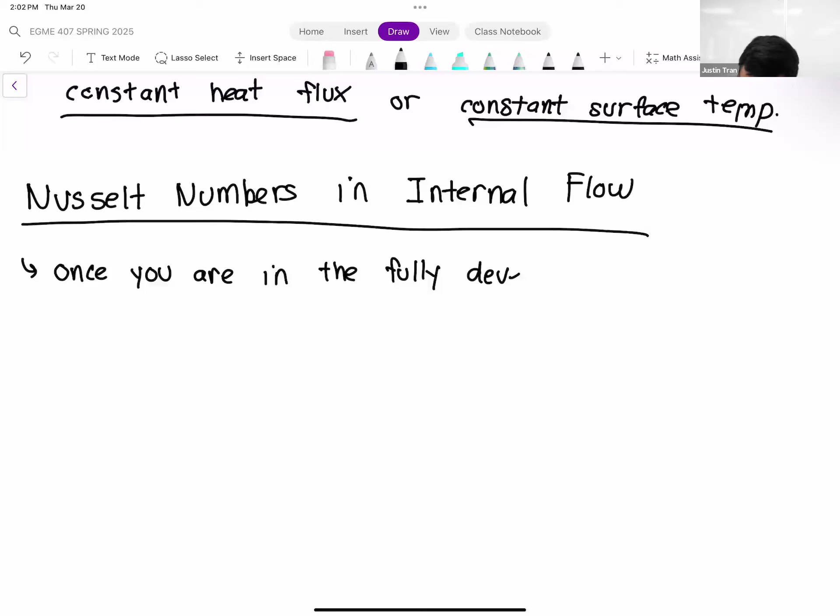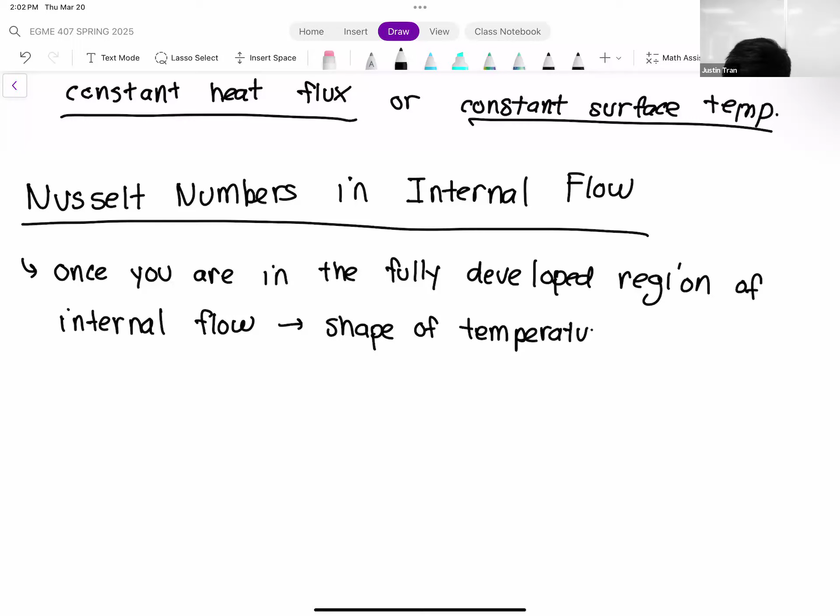So, Nusselt numbers for internal flow. This is a very interesting case because, if you remember what we talked about at the end of class last time, once you're in the fully developed region—and it honestly doesn't take long to get there—the shape of the temperature profile across a cross section does not change.

Now, the values of the temperature may change. The mean temperature obviously is going to change. The surface temperature might change if you have a case of constant heat flux, but the shape of that profile is not going to change. It's going to be the same quadratic shape basically in every cross section. Now, of course, this is assuming laminar flow. That's an important caveat.

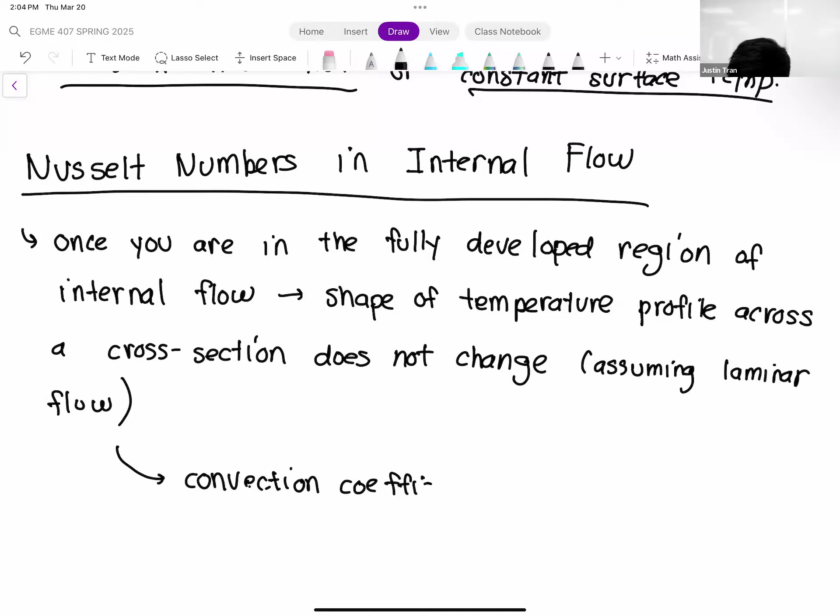This had one very important consequence. One thing our convection coefficient depends on is the shape of that temperature profile—depending on how that temperature changes from the surface to the mean, our convection coefficient depends very strongly on that. This is actually very interesting because even though the mean temperature is changing, even though the surface temperature is changing a lot of the time, the shape of that profile is not changing. And so if the shape of that profile is not changing, it still has a quadratic shape in every situation. This means our convection coefficient is actually going to be constant.

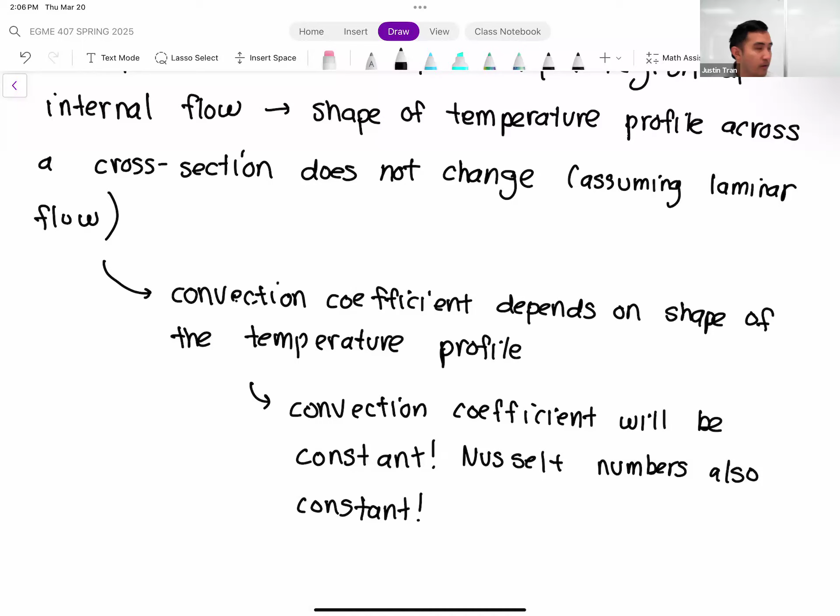And if our convection coefficient is constant, that means our Nusselt numbers are also going to be constant. So we have a very interesting scenario here where, for internal flows—granted, assuming your flow is laminar—your Nusselt numbers are these kind of magic number type of things. There are two situations here.

So if we look first at a situation with constant heat flux: our Nusselt number in this case, based on the diameter of the flow or diameter of the pipe, is equal to 4.36. That's equal to the convection coefficient multiplied by the diameter, divided by the thermal conductivity of the fluid. So it is actually equal to just a magic number, which is really interesting because this almost never happens in math and science at all.

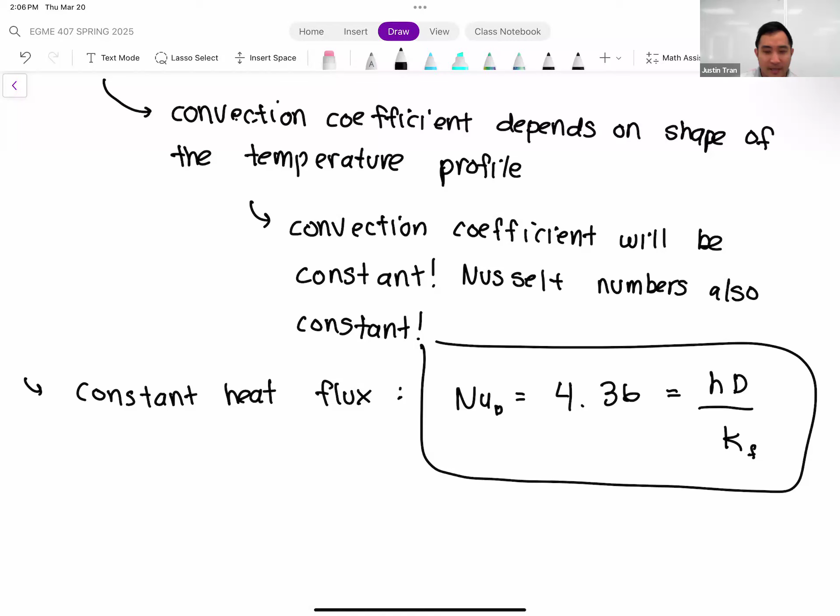We have another expression for the Nusselt number for the case of constant surface temperature. In this case, the Nusselt number based on the diameter of the pipe is equal to 3.66, and that's equal to H times D divided by KF.

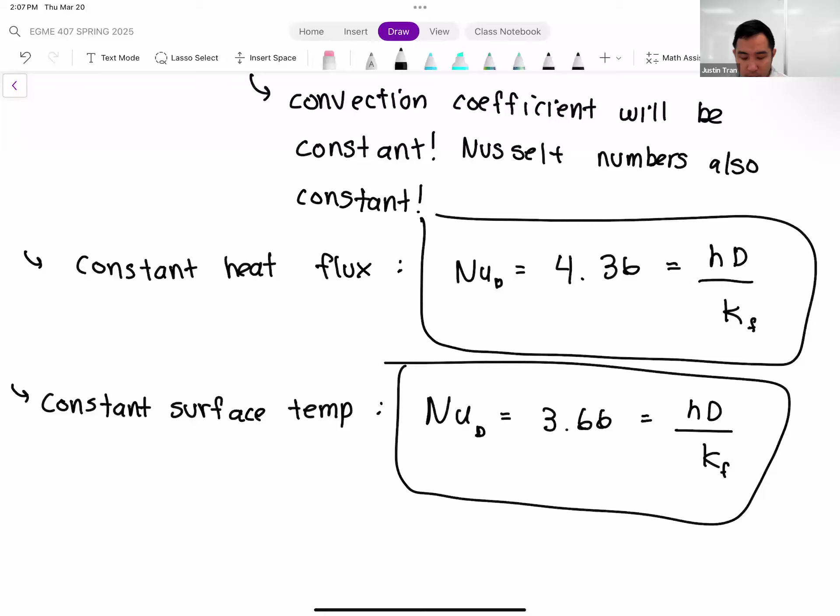So actually, if you need the convection coefficient in internal flow, it's quite simple, and you don't have to go through that whole song and dance, because we have these kind of magic numbers here. So let's take this magic information and see if we can compute or recompute our convection coefficient from the previous example.

Our previous example was the tankless water heater that we just finished talking about. Part 2 of that problem asked us to compute the convection coefficient based on the heat flux. From the previous example, we got a convection coefficient equal to 1500 watts per meter squared Kelvin. This was based purely on the heat flux as well as the surface temperature and the mean temperature.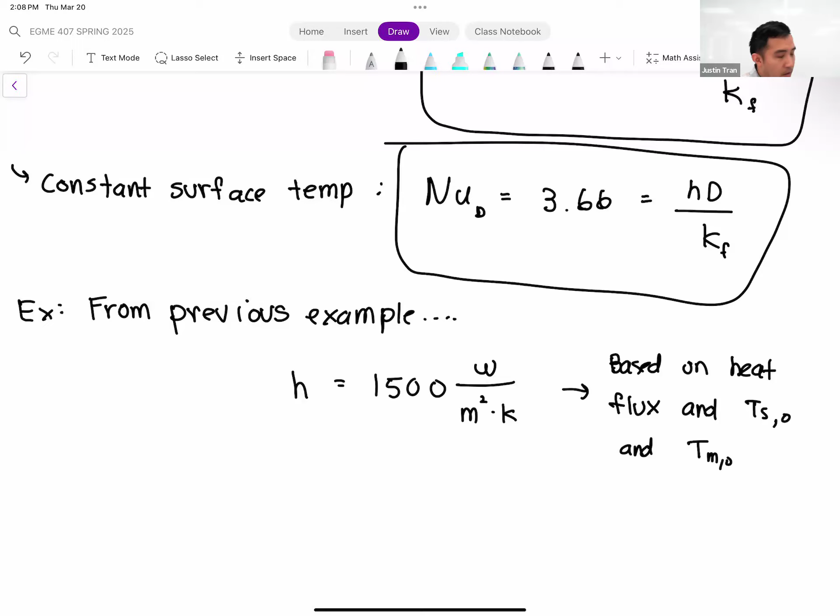Remember, we didn't use any Nusselt correlations to compute that. So let's see if we can compute the same convection coefficient using the Nusselt number that we have up here.

Okay, so let's go ahead and plug in for that. For a situation where we have constant heat flux, our Nusselt number is equal to 4.36. And this, of course, is equal to the convection coefficient multiplied by the diameter divided by the thermal conductivity of the fluid.

So let's rearrange this quickly because we know the diameter from the problem. The diameter given to us in the problem was 20 millimeters, which is equal to 0.02 meters. The thermal conductivity of the fluid, remember, we're evaluating this at the average mean temperature, so this is at 40 degrees C. This is equal to 630 times 10 to the minus 3 watts per meter Kelvin.

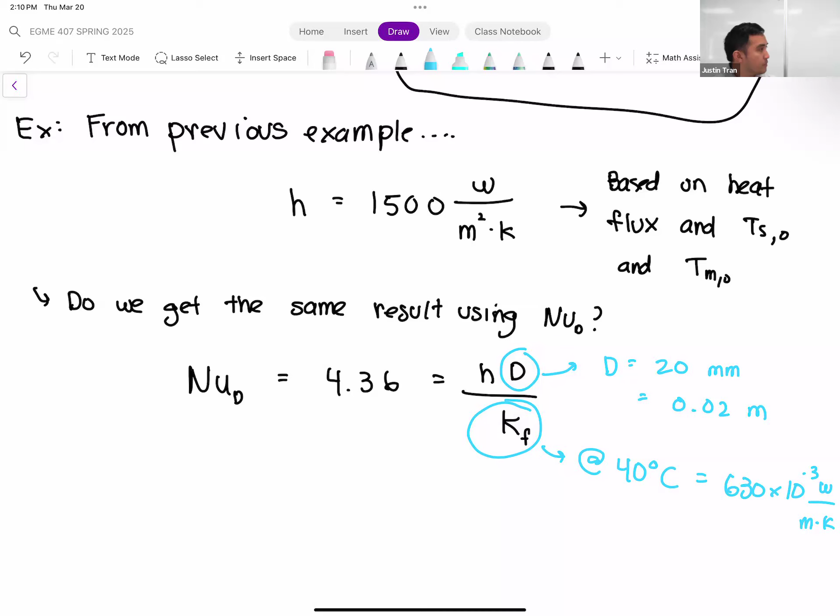So we have everything we need here to solve for H. If we solve for H, we get H is equal to 4.36 multiplied by KF divided by the diameter. So we plug everything in, and what we get is 137.34 watts per meter squared Kelvin.

So that was really easy, right? All we had to really do was just plug in the diameter from the problem. We had to look up one fluid property. And since we know the Nusselt number was 4.36 in this scenario, we just had to work through from there.

But you're probably thinking, wait a minute. From this method, we got H is equal to 137, let's round up, we'll say it's 140. From the problem, we got H is equal to 1500. So these numbers are very different from each other. So what gives? Why are we off by a factor of 10 between these two?

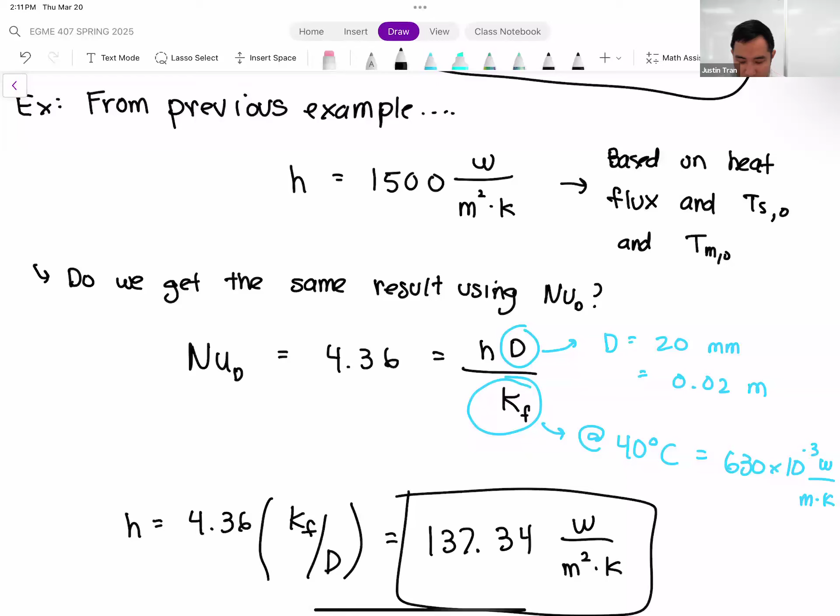Remember the caveat that I gave. These two Nusselt correlations, Nusselt equal to 4.36 and Nusselt equal to 3.66, are only valid in laminar flow. So that's really important. In laminar flow, for internal flows, our Reynolds number has to be less than 2,300, which is very limiting. So probably what's going on in this problem is that because we obtained a much higher convection coefficient, that means our flow is most likely turbulent.

All right, so which one's correct? Which one do you use? Well, in this situation where you're most likely going to have turbulent flow, the Nusselt correlation is most likely going to be incorrect, because this is only valid in laminar flow. So in this situation, I would trust the other one more.

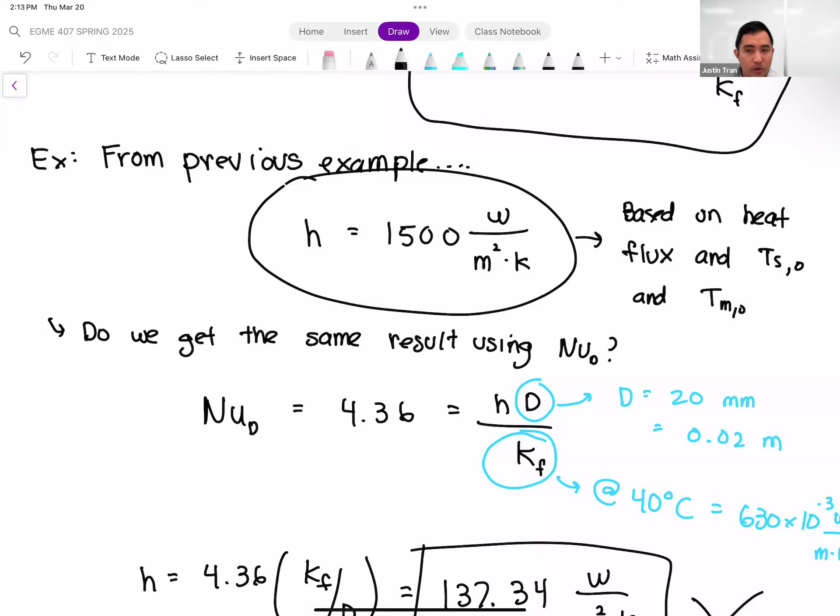Now, granted, we did have to make some assumptions with this number too. We had to assume that the wall flux is constant. It may not exactly be the case, but I would say the real convection coefficient is going to be closer to the 1500 value than the 140 one. So it's probably going to be in the ballpark of 1,200, 1,300, more so than less than 200.

So if you have turbulent flow, these Nusselt correlations are a little bit off. We'll talk next time on Tuesday what to do if you do have turbulent flow. There is a Nusselt correlation for that. Although spoilers, it's just the same Nusselt correlation we use for external turbulent flow. So that gives you a better approximation than this one.

Any final question before we wrap it up for today? So Reynolds number has to be less than 2,000? 2,300. Yeah, that's the threshold for turbulence in internal flow.

All right, so that's all we got time for today. When we come back on Tuesday, I do have one more example for constant surface temperature, so we'll start with that. We'll talk about turbulence a bit more, and then we will move on to heat exchangers.

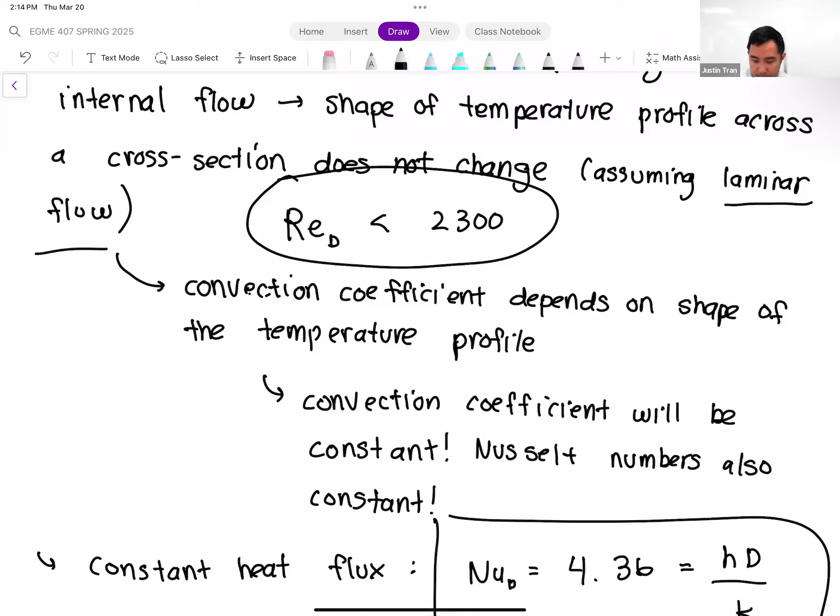Yes, it's mid-April, so I don't think the school has released the exact registration. I think it actually comes out tomorrow, when you can register, but the actual registration dates will be middle of April, April 14th, 15th, 16th.